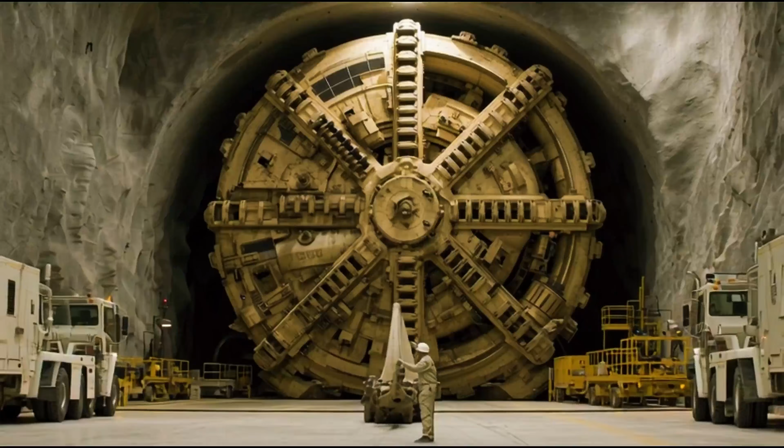Today we are going deep. I mean really deep, not just underground but straight up underwater. We're talking about a place beneath the busiest shipping lanes on the entire planet, where an incredible engineering revolution is happening right now in total darkness. So you have this massive continent-sized nation, but it's split apart by these colossal rivers and seas. How do you connect everything without slowing down progress? That's the big question, right? It's the challenge for a whole generation of engineers in China, and their answer is pretty wild. They're not going over these obstacles, they're going straight through them.

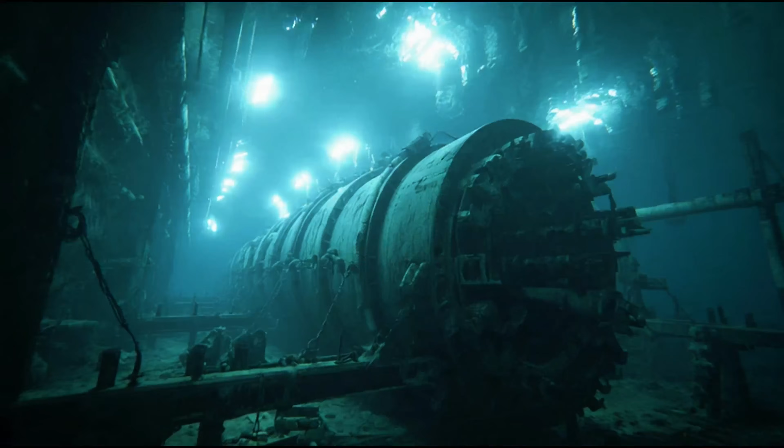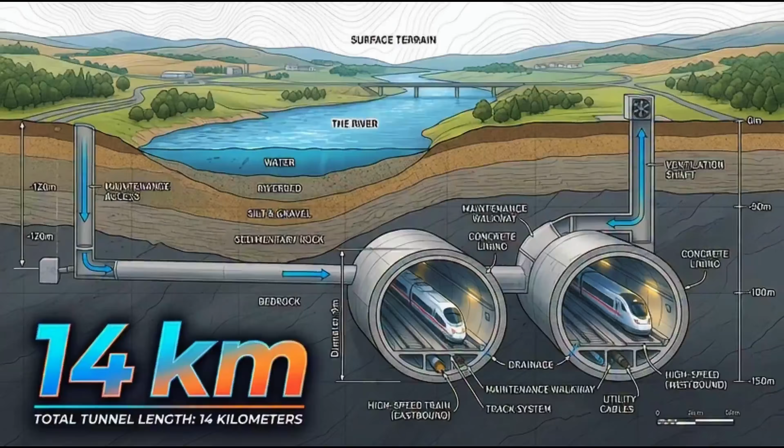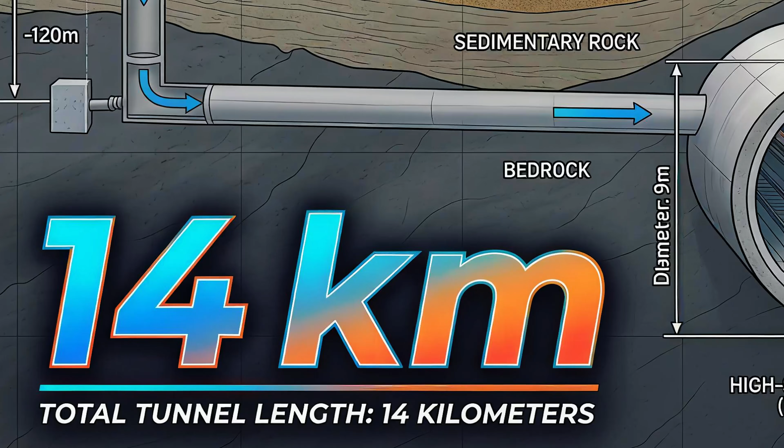Okay, let's start with this number: 14 kilometers. To give you some perspective, that's almost the entire length of Manhattan, from tip to tip. Now, I want you to picture that whole distance, but as a high-speed rail line. And it's not just a rail line, it's completely underwater, carved right through the soft, incredibly unstable silt of a riverbed. Wild.

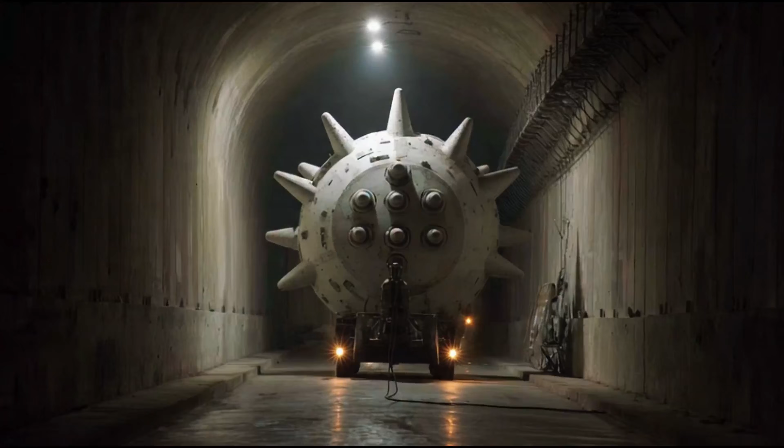Next up, 89 meters. That's how far down this thing goes. Think about a 30-story skyscraper, but instead of going up, it's plunging straight down, underneath the busiest river in all of Asia. You can just imagine the pressure down there. It's immense. And the margin for error? It's literally zero. None.

And then you've got the speed: 350 kilometers per hour. We're talking faster than a Formula One car going flat out. And all of this is happening inside a sealed tube buried deep beneath a massive river. It's just incredible to think about.

And finally, let's talk about the price tag: $72 billion. And get this, that's just for one section, one of these new steel arteries that the tunnel makes possible. So you see, these aren't just random statistics, they're basically the vital signs of a whole new era in engineering. So the mission here is pretty straightforward. If you want to conquer geography that seems impossible, well, you've got to build some impossible machines.

And let me tell you, the machines at the very heart of this revolution are absolute titans. So let's meet one of them. This is Linghang Hao, which means navigator. It weighs a staggering 4,000 tons and is as tall as a 5-story building. This is so much more than just a machine. It's one of the colossal tunnel boring machines, TBMs, that are driving this whole underwater revolution.

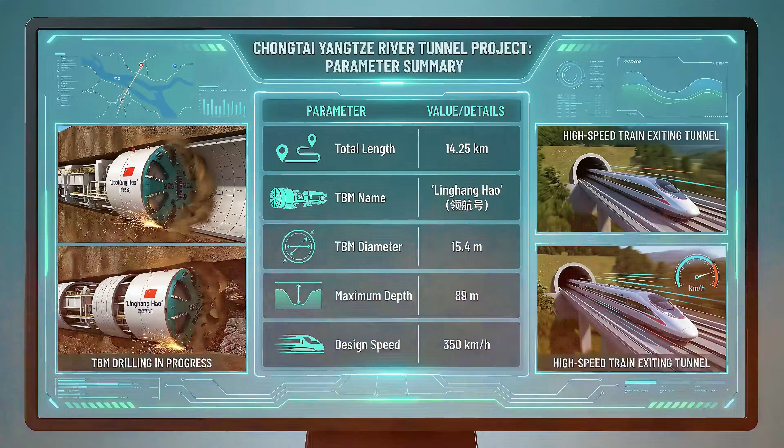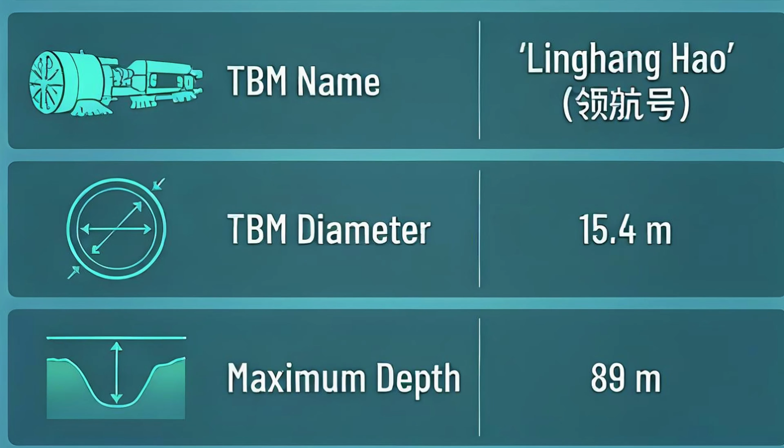So let's break down its mission specs. The job: carve a 14-kilometer tunnel. It's got to be wide enough for 2 high-speed trains to pass each other and deep enough to sit 89 meters under the riverbed. And the whole thing has to be so perfectly stable that trains can just blast through it at 350 kilometers an hour. To pull this off, this one machine set a world record. It bored over 11,000 meters in a single, continuous, totally unstoppable push.

Just incredible. But here's where it gets really cool. What makes these titans so revolutionary isn't just their size, it's their intelligence. We're not just talking about brute force digging machines here. No, they're basically becoming sentient explorers. Okay, so check out how this works. It has this complex nervous system with over 500 sensors that literally feel the rock and soil around them.

And for every single meter it moves forward, it sends 80,000 threads of live data to an AI smart brain. Now, this brain runs what's called a digital twin. It's a perfect virtual copy of the tunnel. This lets it simulate the path ahead and actually predict problems days before they even happen. What you get is a machine that operates almost by itself, with precision down to the millimeter.

And this leap in technology, it signals a massive power shift. You gotta remember, back in 1997, China had to import its very first 2 TBMs from Germany, and they paid a fortune for them. By 2006, they'd spent over 10 billion yuan just importing over 100 more. But now, in just a couple of decades, the country has completely flipped the script from being a technology importer to a global powerhouse.

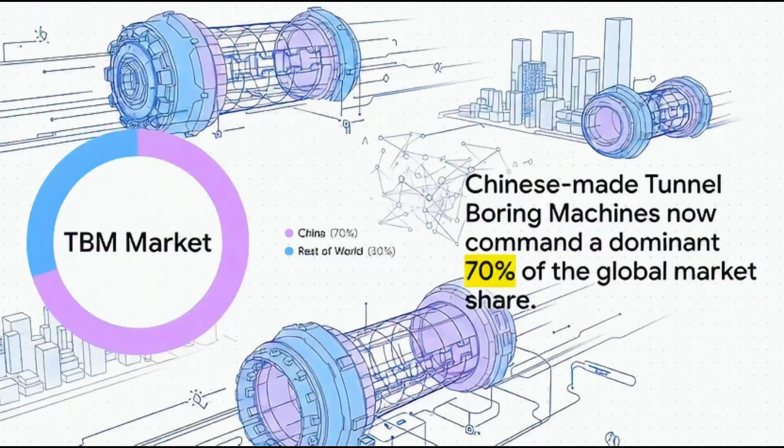And the result of that flip? It's just staggering. Today, Chinese-made TBMs absolutely dominate the global market. We're talking 70%. They're exporting these massive titans to projects in over 40 different countries. It's a huge change. But here's the thing—these incredible machines aren't just digging random, isolated tunnels. Each one is a crucial piece in a much bigger puzzle, part of a plan to completely rewire the economic map of the entire country.

These tunnels are key links in what's known as the 8 vertical and 8 horizontal high-speed grid. It sounds a bit technical, but the goal is simple: create a seamless, interconnected web of railways that spans the whole country. They're aiming for 60,000 kilometers of high-speed rail by 2030. That's a lot of track.

So the key takeaway here is that this is about way more than just faster travel times. There was an editorial in China Daily that put it perfectly—it said the goal is to upgrade the productive DNA of entire regions. Think about that. This is a fundamental rewrite of the nation's economic geography. And the economic kickback from this is enormous.

Just take the Shanghai-Chongqing-Chengdu corridor, the one this new tunnel is part of. It's expected to create nearly 1.5 trillion yuan in added value for industries all along its 2,000-kilometer path, connecting manufacturing hubs, major labs, and tons of smaller cities that have never been on the high-speed network before.

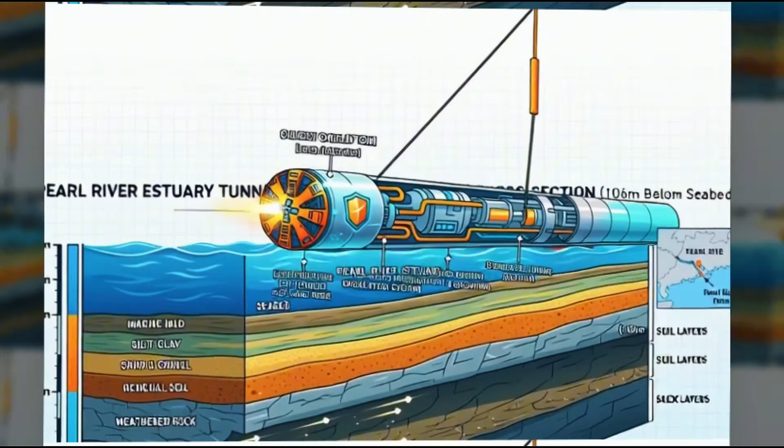But you know how it goes—with every success, the ambition just gets bigger. Now, engineers are pushing these giant machines into places more hostile, more complex than anything they've ever faced before, taking on their deepest challenge yet. So say hello to the Pearl River Estuary Tunnel. This one is part of the Shenzhen-Jiangmen Railway, and it just set a new world record for depth, 106 meters below the sea. The conditions down there are so nuts that engineers have a nickname for it—they call it a geological museum.

At that record-breaking depth, the machine has to deal with a constant water pressure of 10.6 bar. To help you picture that, it's like stacking almost 11 kilograms of weight on your fingernail and just leaving it there all the time. The thing is, no one had ever designed a machine to work under that kind of intense force before. The engineers literally had to invent the solutions on the fly.

The TBM for this job, Shenjiang No. 1, basically had to run a gauntlet of geological nightmares. We're talking punching through 13 different kinds of rock, carefully navigating a fractured fault zone that was almost half a kilometer long, and then grinding through granite so hard—about 125 megapascals, harder than most high-strength concrete—that it needed special diamond-tipped cutters to even make a dent. And it had to do all of that while fighting that crushing sea pressure just meters over its head.

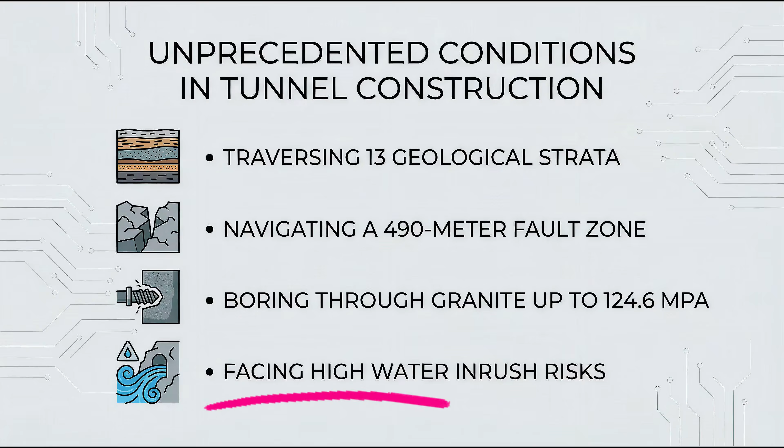So you have these incredible feats—the speed under the Yangtze, the record-breaking depth under the Pearl River. Well, it turns out those are all just practice runs. They were warm-ups for the ultimate challenge, a project that if they actually pull it off, will completely redefine the limits of engineering for the entire world.

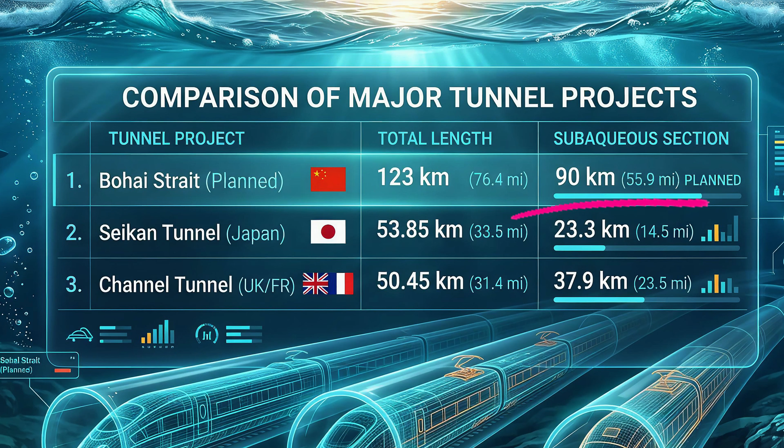This is the Bohai Strait Tunnel. It's still in the planning stages, but at a proposed 123 kilometers long, it would absolutely dwarf every other underwater tunnel on Earth. Just its underwater section alone, 90 kilometers, is more than double the length of the Channel Tunnel that connects the UK and France. It's just on another level.

And the goal behind it is just as audacious. Right now, it takes about 8 hours to cross the Bohai Sea by ferry. This tunnel would slash that journey down to just 40 minutes by train. What that does is create this perfect, seamless coastal corridor up north, essentially stitching the industrial hubs of northeast China directly to the economic engine of the Yangtze Delta.

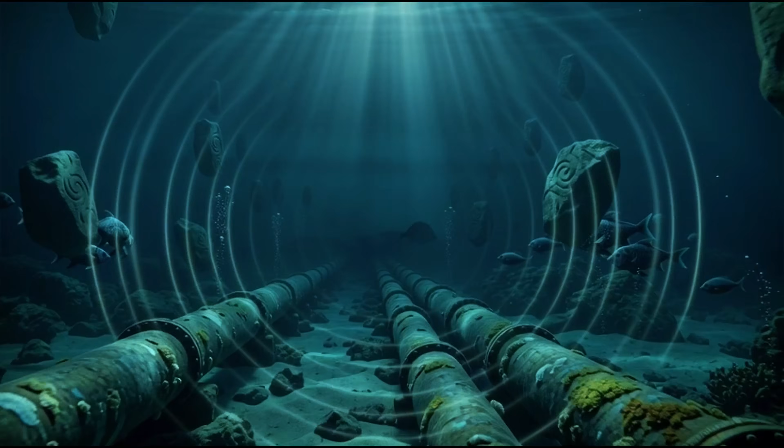So all of this brings us to one final big question. Now that we're mastering the technology to literally conquer the depths of our own planet, what's next? What geographical barriers, the ones we've always thought of as permanent, are going to be the next to fall? Because these titans digging beneath the waves prove one thing for sure: what used to be an impassable wall is now just the next engineering frontier.